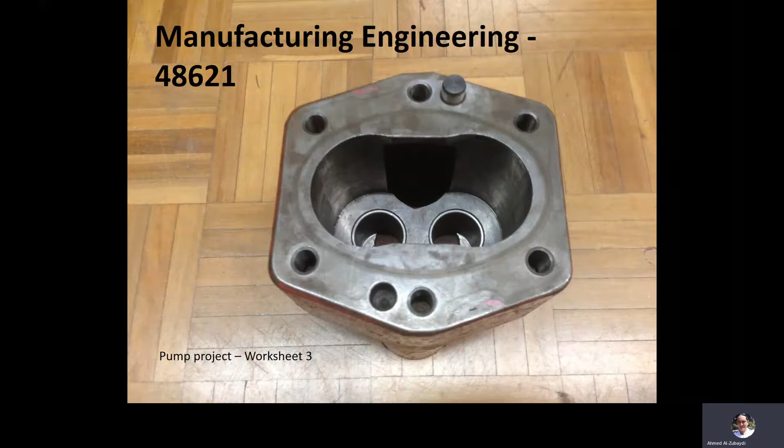Okay, so we'll start first with the slide. Talk about the third part of the major project. So I already explained the outline of the report during the lecture, and I think you got the video, right? Yeah. Yes.

Just give me 1 second. Stop doing that. Okay.

So, in the third part of the major project session, we're going to talk about the other machining processes. In the second one, we talked about the turning process for the gear parts. And of course, you remember that for the gear part itself, we should cut the teeth for the gears on the part, and this should be done on the milling machine.

The second part of the process is going to be the main body and how we are going to do machining for it. Now, as you can see from the photo of the main body here, this part cannot be rotated on the machine. It's a big solid part and non-symmetrical, so it cannot be rotated on the machine. So definitely we're going to do that part on a milling machine and honing machine or a drilling machine, but not on a turning machine.

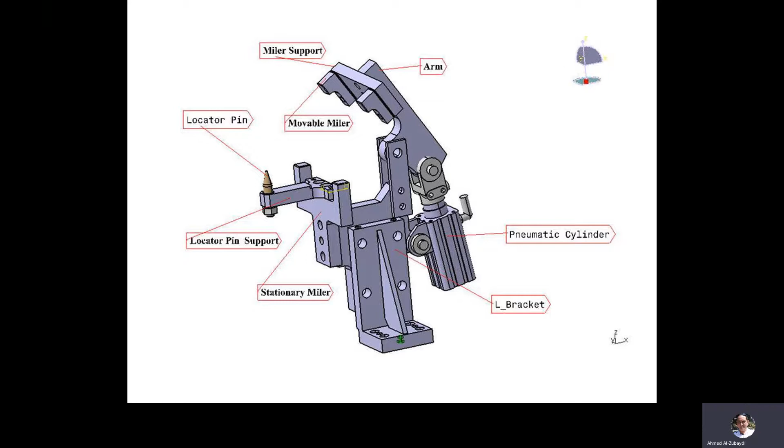We can have specially designed clamps, and this will be in case I have a special part which cannot be held with the common clamps available to us. Okay, now these are more different shapes of the clamps, as you can see here, holding different geometries during the machining operation.

Now, the most important thing for us to increase the productivity, which means reducing the machining time, is to use a holding device that can be opened and closed at a faster rate. And that's what we actually have for this one. Okay, so simply just unscrew, remove the part, and screw in another one. Even if we're going to have a machining center, we need to load and unload the parts on what they call the pallet at a faster rate. Less machining time means we're going to have less cost for the parts.

Now, this is a video for the work holding examples. I don't know why I can't have the...

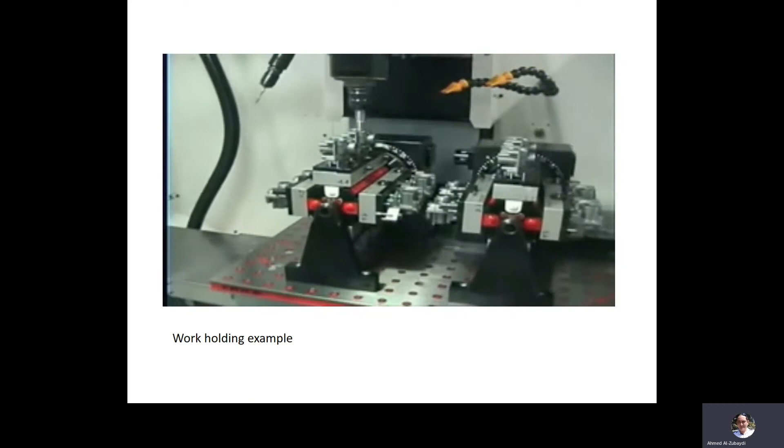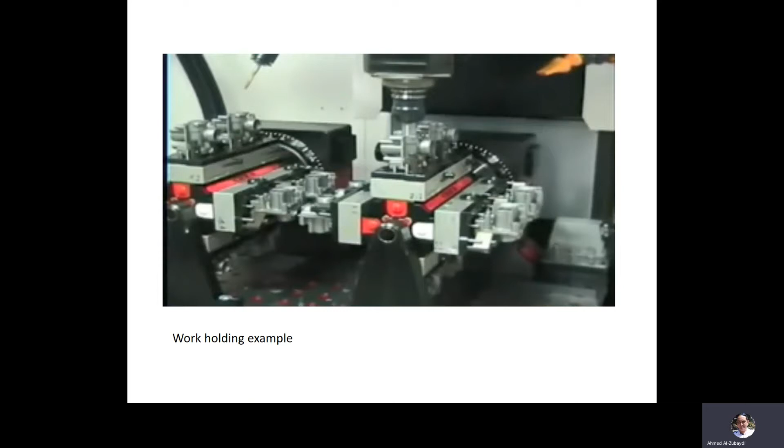So you can see that we have 2 pallets, and each pallet is actually carrying something like 12 parts, and the machining will be done seamlessly on all the parts at the same time. Now, actually, this is 2 on each side times 4, that's 8. So we have 16 parts machining at the same time. And this, of course, is going to reduce the time for the machining.

I don't know why I don't have the voice for that.

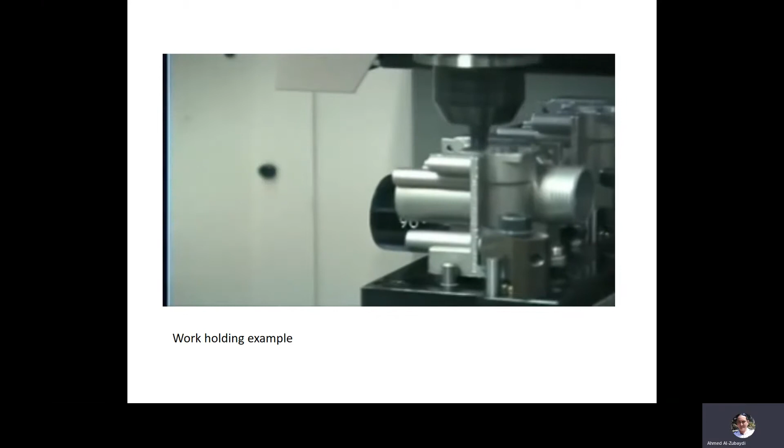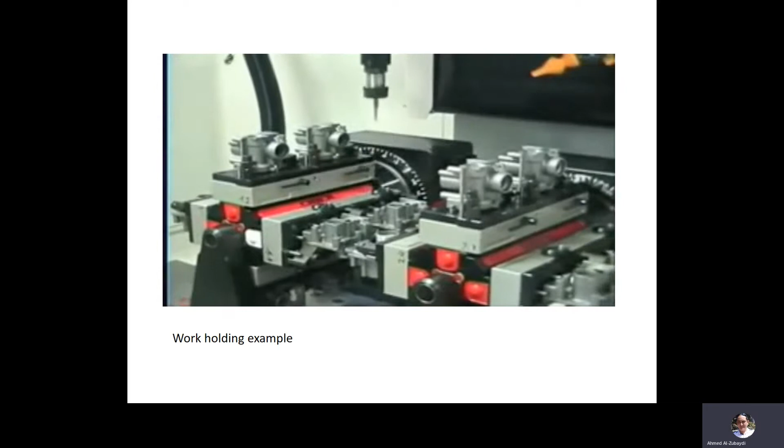Drilling, we can do the threading. Okay, so that machine, once again, is called the machining center. Sometimes it's going to be a milling drilling machining center, sometimes it's going to be a milling turning machining center, where the parts can be machined all at the same time. This part actually is a car carburetor, and that's for the old models before we had fuel injection.

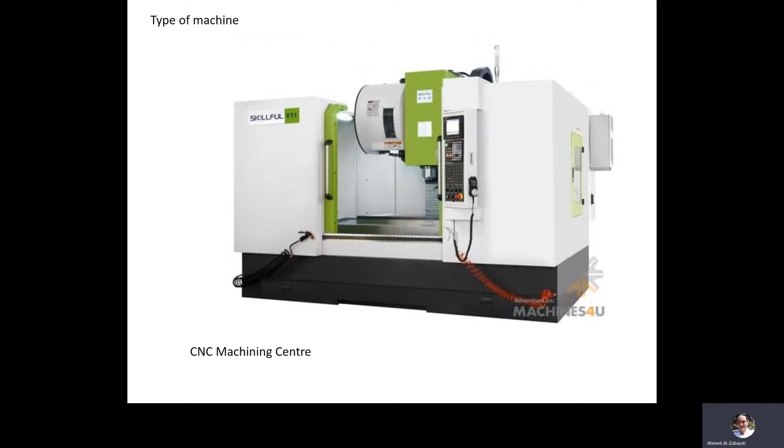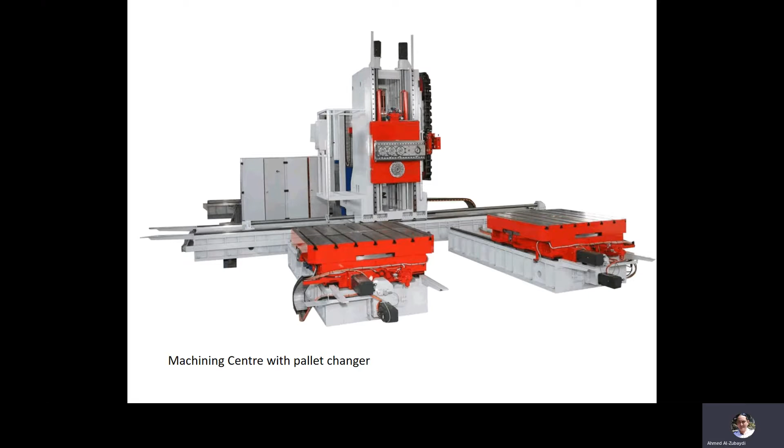So this will be the shape of the CNC machining center, where we're going to feed the pallets inside, and this is usually done by using something like this, which we call the material handling system. We have a main system and we have a secondary system. Usually the main system is going to be on this line, and here we're going to have the secondary system, where we have the buffering for the pallet before we feed it to the machine.

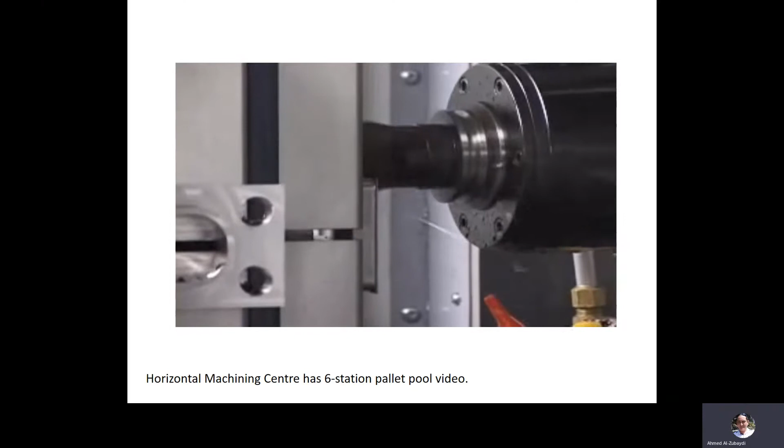System make it an easy, low-risk option for job shops looking to automate the process. Like other high-productivity machines from Haas, EC400 has a number of unique features that make it a perfect fit for both high-production environments and job shops looking to expand their capabilities. Unique features. A side-mount tool changer, automatic chip removal, 300 psi coolant, and advanced management functions make the EC400 an extremely capable resource for any production shop.

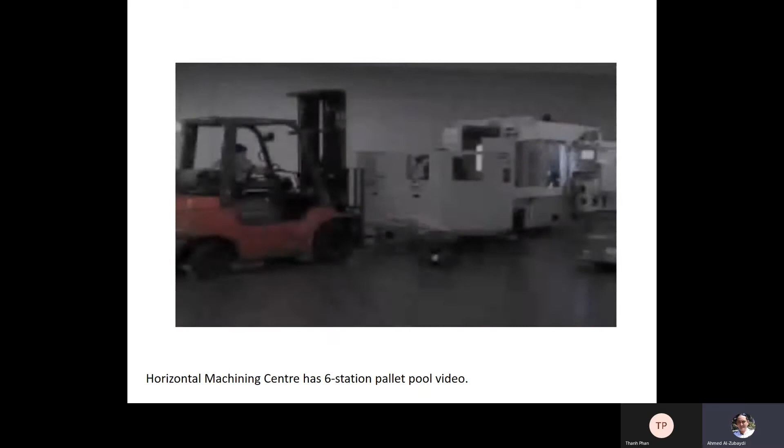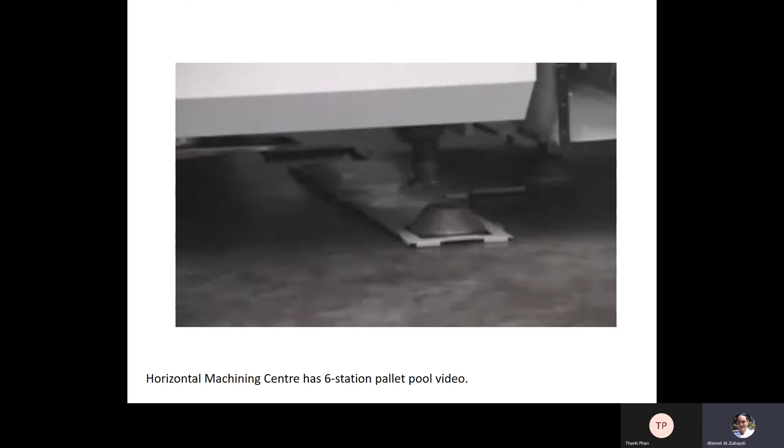Simple installation. The pallet unit is assembled at the factory and shipped in one piece. At installation, the EC400 installs just like a standalone counterpart. The pallet unit is aligned using a technique supplied with the machine. Fine adjustments take just a few hours.

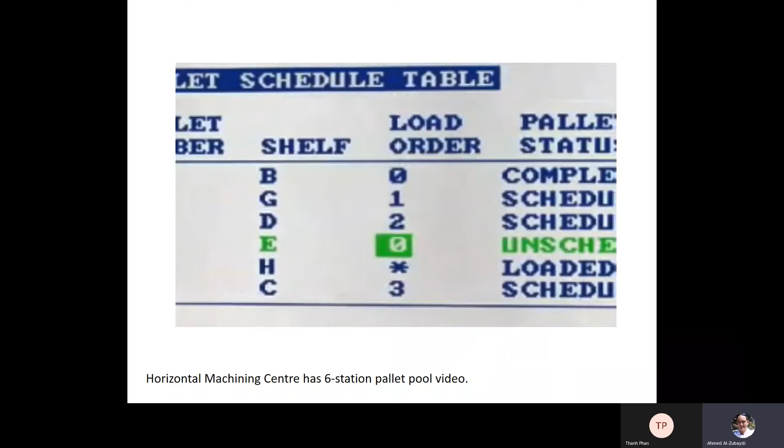Intuitive pallet scheduling. The EC400 pallet unit programs just like any other Haas machine using industry standard G code. 6 pallets in the pallet unit are scheduled using the versatile pallet scheduler for control. Here, the operator will assign a program to each pallet, schedule jobs, and the operator can move the pallet on the load station back to the storage rack, simply by entering the pallet number.

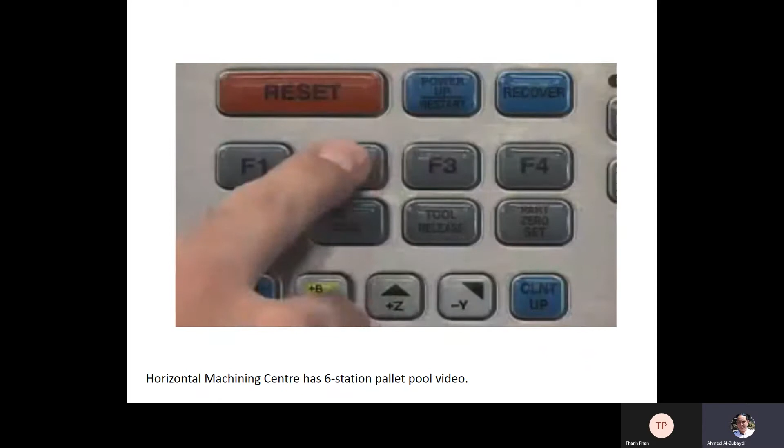Okay, so the one inside is the primary material handling system, and the one outside, which is holding the pallet, we call the secondary one. Okay, I'm not going to continue that, but it's very important to know that this machining center is a multi-million-dollar machine. So you are going to put it as an alternative machining process. It's not going to be the main one.

Why? We have a workshop. We have a CNC milling machine, and we're using it for different jobs. In case I'm going to be specialized in making this model of the pump, then we have to go for a specialized machine like this one, which can do mass production. But if this project is going to be a shop job, we had a customer and he said, okay, I would like you to make 1,000 pieces of that. So you are a contractor.

So as a contractor, you will accept the job, and he will give you standards and specifications for the pump, and you will start to do the work. You study the engineering drawings and the manufacturing process for that, and actually that's your report. So what you're writing down is the task of the production engineer. You write down how to make the parts and how to make the final assembly.

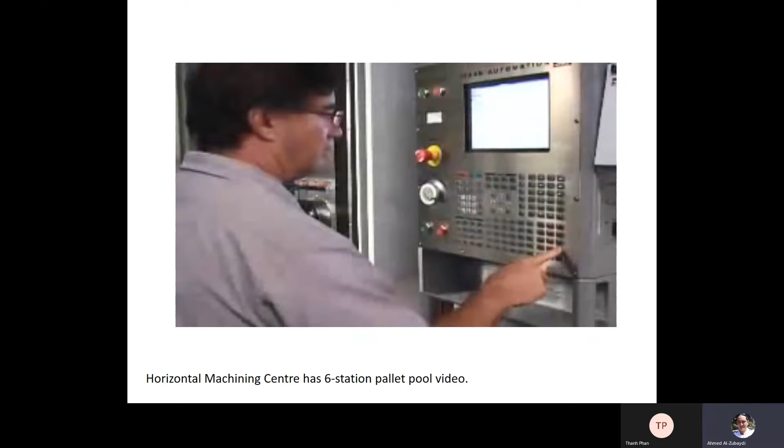So you will suggest, okay, now we have the CNC milling machine, but we don't have the casting operation, so we can do the casting with another contractor, which can be a foundry. We select different materials depending on the availability and the cost. And then we are going to have the cast parts, and we start to do the machining for them. So this is the cast part, which is going to be this one. So the first operation is going to be the face milling for the split face.

Okay. So to make this one, we need to have a certain grade. The surface finishing for this one is going to be quite important, because we're going to have a seal between this surface and the cap surface, and we should prevent any leak under high pressure. So the surface finishing for this one is going to be very important. This will be done on the milling machine.

It depends on the time required to submit the 1,000 parts. Okay, say we are going to make 1,000 parts a week. In that case, we will do the calculation. If we think it's going to be worth it to buy the CNC machining center, then we can buy it. If not, just use the machine you have in your workshop. Okay, so this will be the first operation: do the milling operation for the split face.

Important and critical dimensions, because we are going to have a leak possibility if this surface is not machined very well. Then we need to do the drilling and the threading for the threaded holes, where we're going to have the 6 studs sitting there to lock the 2 parts.

Now the dowel face: we're going to have these dowels sitting on both sides. Why are the dowels going to be important? Keeps the two halves aligned. Exactly. So it's going to guide you to the correct position of the cap on the main body. Because trying to realign it by yourself would be wasting time.

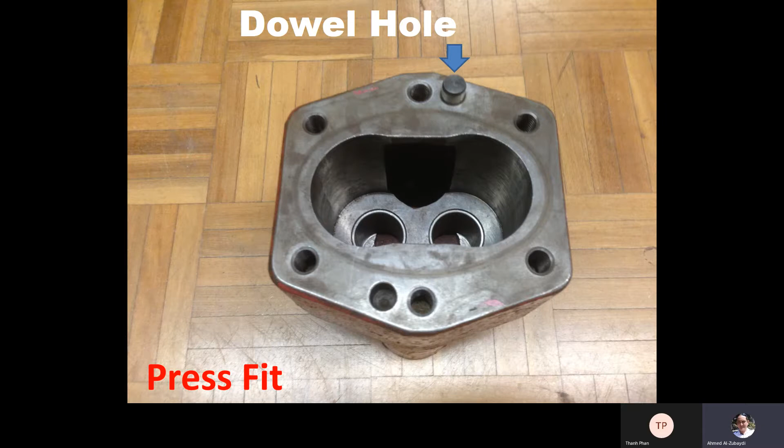Clearance fit. So the dimension is very important, because we would like to put the dowel in by doing a press fit inside the hole. We're not going to take it out for one of the parts. It should be fit there, not moving. Now, how to achieve a clearance fit dimension for the hole? You remember the steps for making a correct hole? We explained that in the drilling lecture.

We do the drilling, we do the boring to enlarge it a little bit, then we do the reaming to have the exact dimension. So for example, if the diameter of this hole is going to be 10 millimeters exactly, because the diameter of the dowel we're going to put in is 10 millimeters exactly, how to do that? We're going to drill a hole with a dimension of, let's say, 9.5 millimeters. Then we use the boring operation to enlarge it a little bit to make it 9.9.

Then we're going to use the reaming to get the exact value of 9.99 millimeters or 10. We're going to have tolerances for that. For example, the acceptable dimension can be between 10.01 and 9.999. And this is to make the dowel sit exactly inside the hole.

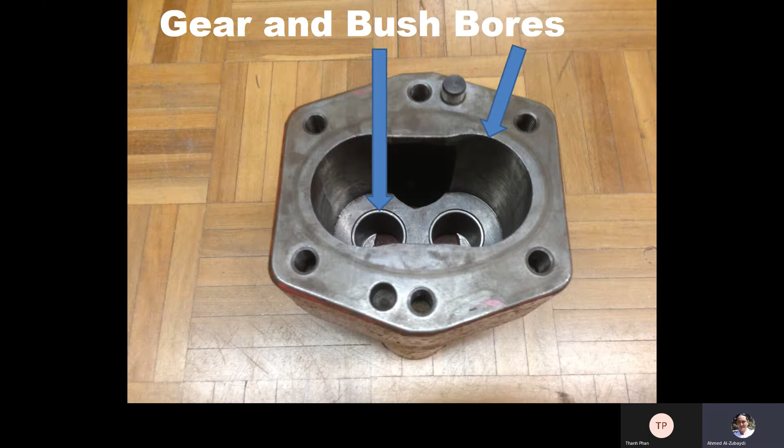Now, the next operation is going to be the cutting for the gear and the bush bores. This operation, once again, can be done on the milling operation, but we can still take it out and do it on the boring operation. Now, why did I say boring and not drilling? Because these holes are almost already available, because we put the core in when we did the casting operation. Okay, so we already have the holes. We're only going to enlarge them and make a good surface finish.

So this operation can be done by boring, or it can be done on the milling operation, depending on the accuracy or the dimension you would like to have. I think this one is repeated. Okay, so we're going to repeat that again. We do the milling for the joint face. We drill and thread the holes. This can be done on the milling machine and also on a special drilling and threading machine. And then we drill and get the accurate dimension at the clearance fit for the dowel holes.

And then we do the machining for the gear and the bush bores. This can be done by either turning, milling, or on the boring machine. And we can also do honing, by the way, because once again, we would like to have some lubricant in these holes, similar to what we have in a car engine, because the gears are always going to have contact with these walls, and we would like to have continuous lubrication. Okay, so we go now to the other side.

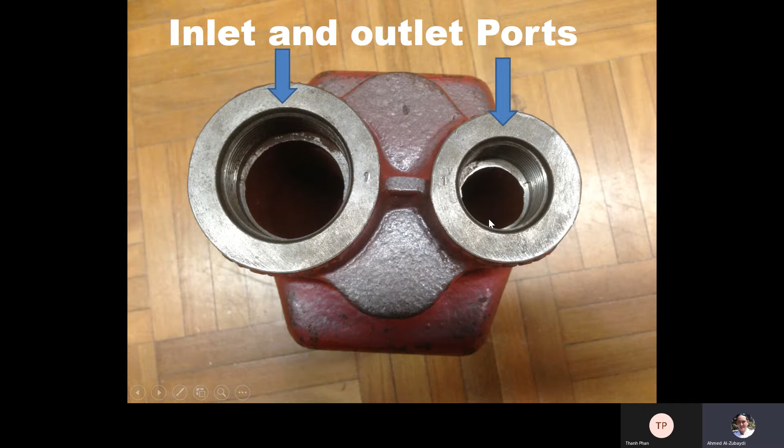On the other side, we need to do the face milling operation for both ports. On these surfaces we're going to have the milling operation. Just simply do the face milling cut, and then we can do the threading operation for these holes. Threading at this size can be done on the milling machine. So to write down these things, we can simply tabulate them.

This part of the table is coming from something called the route sheet. On the route sheet, as a production engineer, you're going to write down the steps: the machine, the tool, the description, and you give a recommendation for the cutting speed and some comments, for example how to hold the part. So operation number one is going to be the mill studded face.

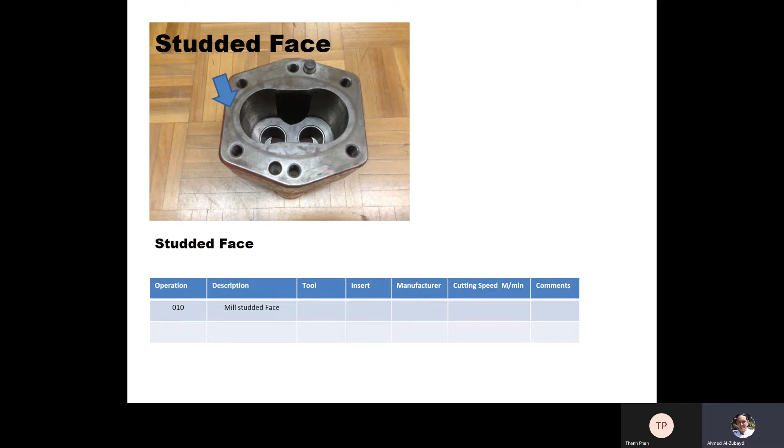I'm going to use the face milling cutting tool to do the face milling for the studded face. The tool we're going to use should be the face milling cutters, because this will be able to cut the flat surface with good surface finishing.

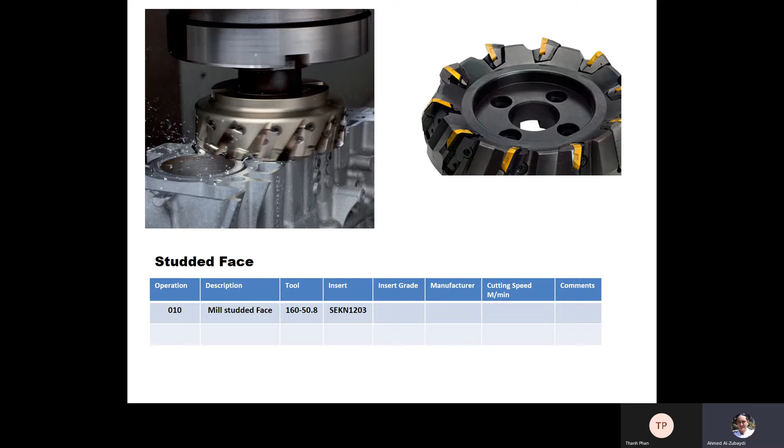Then these are some examples for the cutting tool. You can use the same tool in your table. So the tool is going to be the 160-50.8, and the insert type is going to be the SEKN 1203.

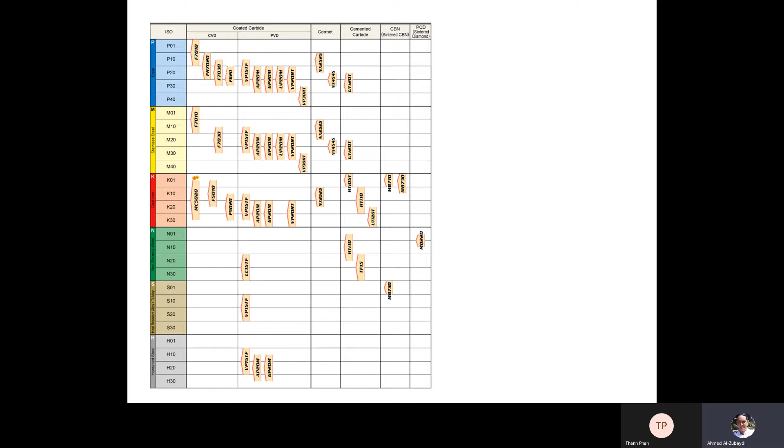For the grade type, you can get it from this table. This will give you, depending on the cutting tool, what will be the ISO standard for the insert grade. So we check the insert grade, it's going to be the K20, and the cutting speed recommended for this type of cutting tool with this material is going to be 120 meters per minute.

We give a name for the suggested supplier, so that if the workshop doesn't have it, they will be able to find it. Operation number two is going to be the drilling for the cap screw holes. By the way, this is the face milling operation, and this is the video for it.

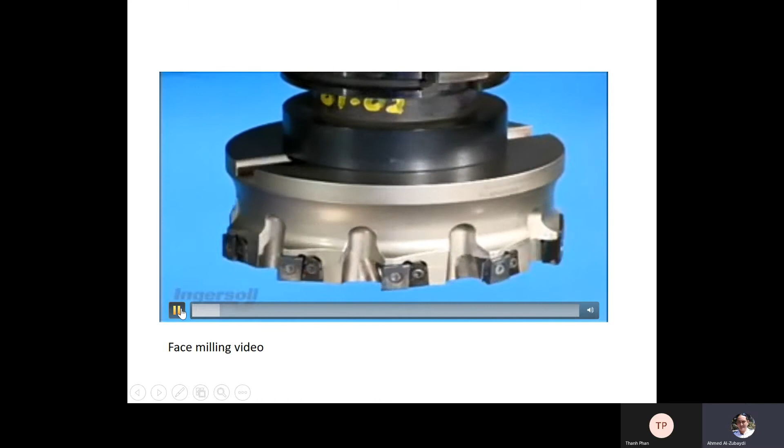Of course, more tools is going to be better for a higher rate of removal of the material.

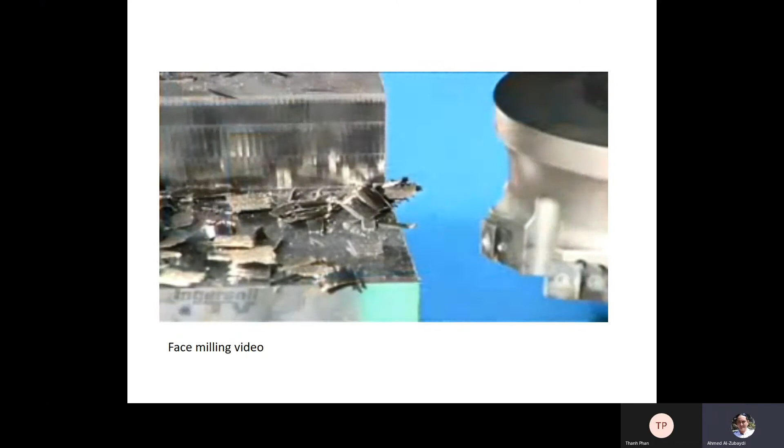And we're going to achieve a new surface. Now, of course, the quality of the surface we achieve will depend on the velocity and the feed rate, the rotation velocity and the feed rate. This is considered an acceptable dimension for the surface roughness of the part.

Can you tell me how this custom cutting tool is working? It can cut a small diameter and a larger one at the same time. So it can cut in two different diameters at the same time, meaning one shot does both cuts. This reduces the time for the machining. For example, using the 20 millimeter diameter cutting tool, just keep doing rotation multiple times to achieve the final cut.

Hey Ricky, how are you? Do you need any help? Oh no, we're going to finish in 10, 20 minutes. Oh really? Okay sweet. Are you meant to be here until 7 today? Yes, meant to be, right? Yeah, but we don't have just a theoretical thing. Yeah cool, no worries, we're covering that, we're recording it, and we're going to distribute it to the others. Sweet, alright, I'll leave it to you then. Thank you for coming, sorry.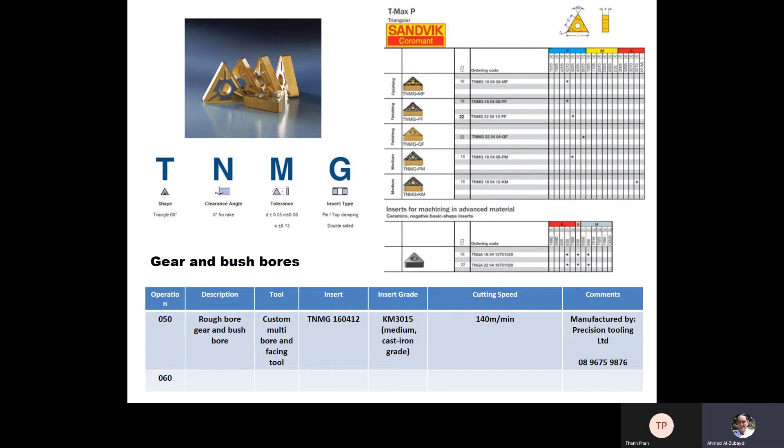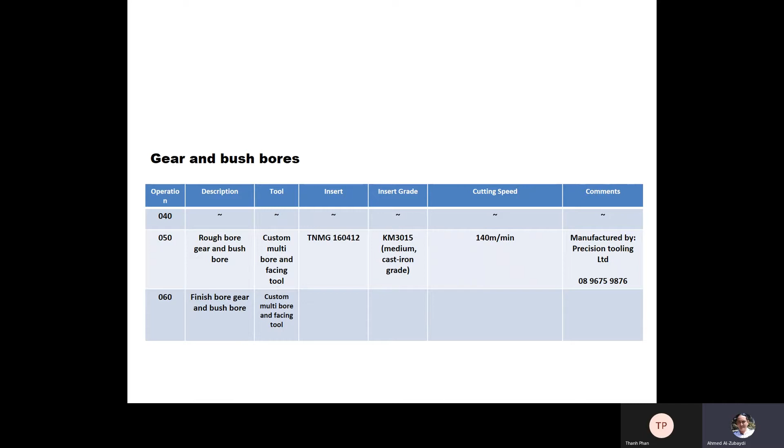The next operation is going to be, once again, the gear and bush bore. The first one was the rough cutting, and the second step is going to be the finishing cut. What you can see here is the custom cutting tool. You can see this different one, but it's going to cut different levels from inside and outside at the same time.

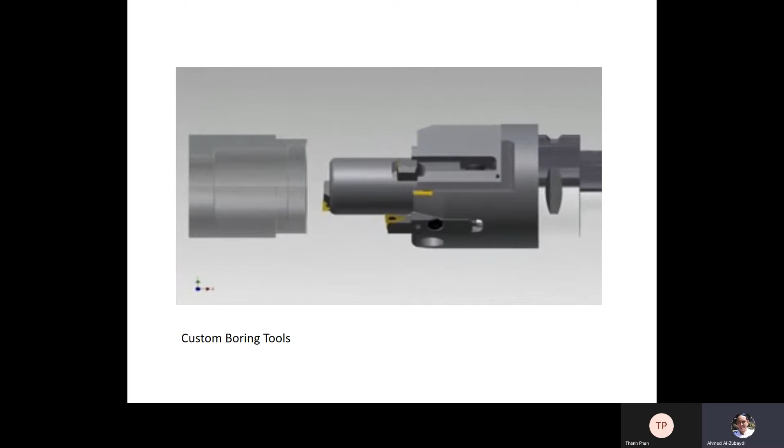Okay, so one movement is going to finish the whole work without repeating the process. You have the tables available for you for each operation. I advise you to make your own Excel sheet with the multiple steps and try to put everything there.

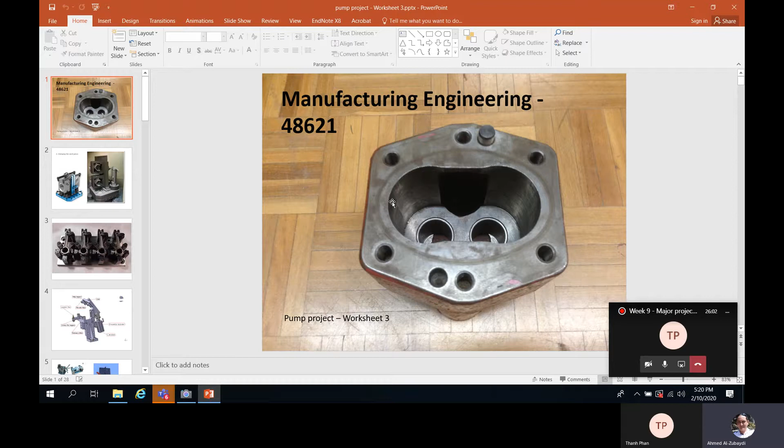Now, in this folder, I remember that I used to have the inspection process.

And this, once again, is going to be a good exercise for you to be a production engineer. You're going to be in a workshop one day, try to explain to the technician what to do and how to do it.

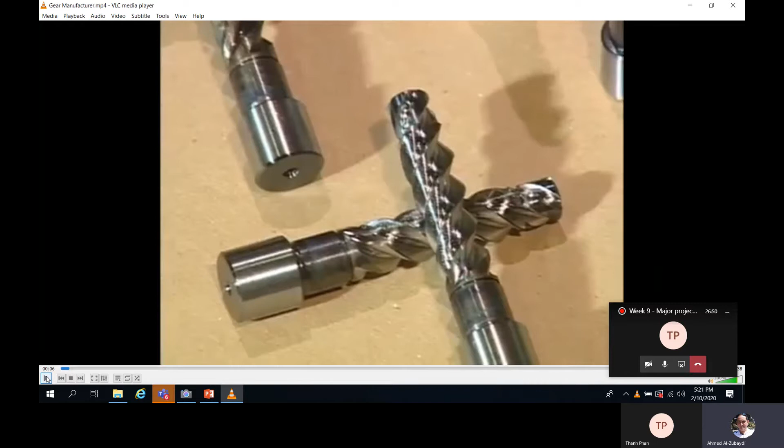Okay, now we're going to watch multiple videos before we go, and this first video is going to be about gear machining.

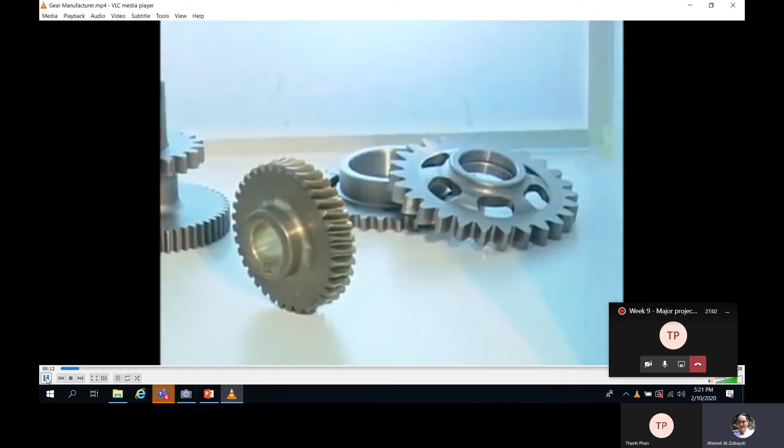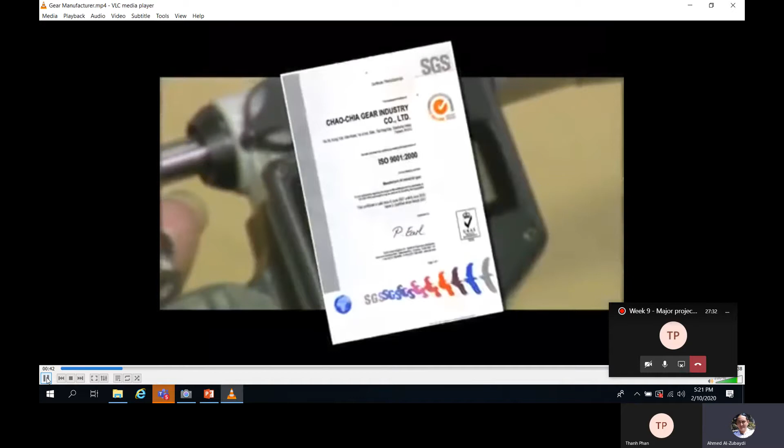Process technology in Taiwan: we have always taken to improving technology and innovating equipment as our core concept. Chao-Chia Gear Industry Company Limited was founded in 1984. It has contributed to its customers for almost 30 years. Established in eastern Taichung City, it began with the development of middle and small gears. We expanded the facilities and strongly and healthily developed, and we are now involved in the manufacture of precise micro gears, having passed the ISO 9001 international quality attestation—the most important enterprise partner.

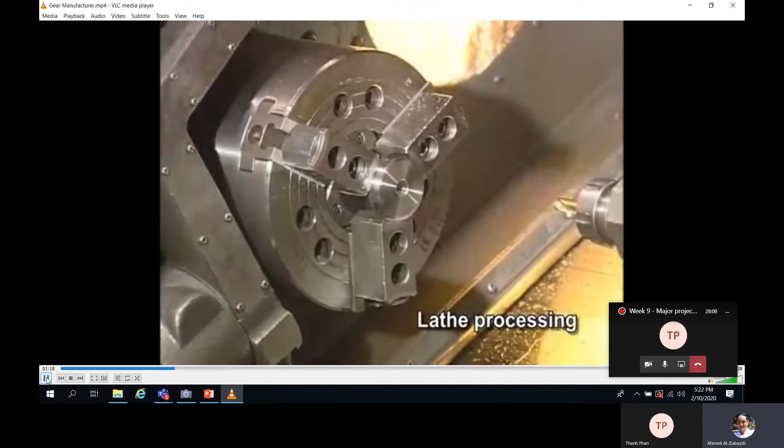Process techniques and process: procurement of raw materials. Incoming raw materials must pass relevant quality and safety standards and be certified by our QC department before further processing. Once the raw material passes QC standards, it is then put through CNC machining to achieve pre-shaping. The entire process is done by auto-feed CNC equipment to ensure high productivity and precision finished products.

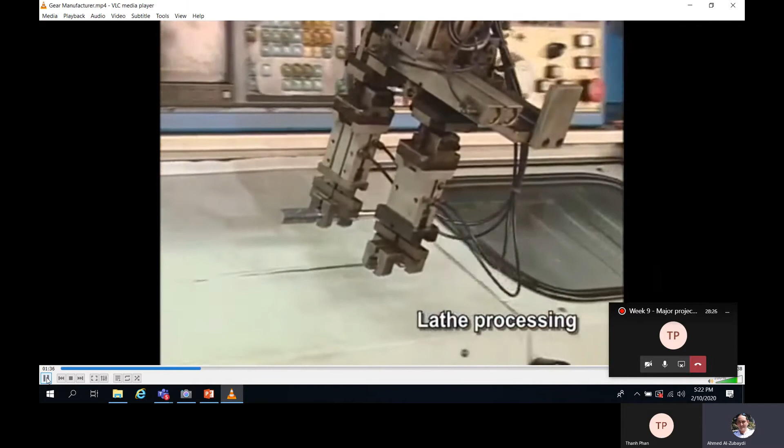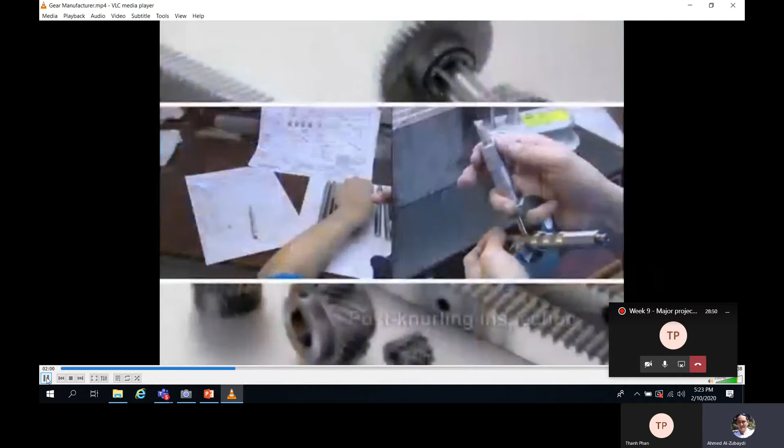A vernier height gauge and run-out inspection machine, etc., are used to check the length and concentricity of the finished product. The purpose of knurling is to improve the shaft in the way of being firmly fixed on coiled silicon steel sheet. Quality control personnel then inspect the outside diameter.

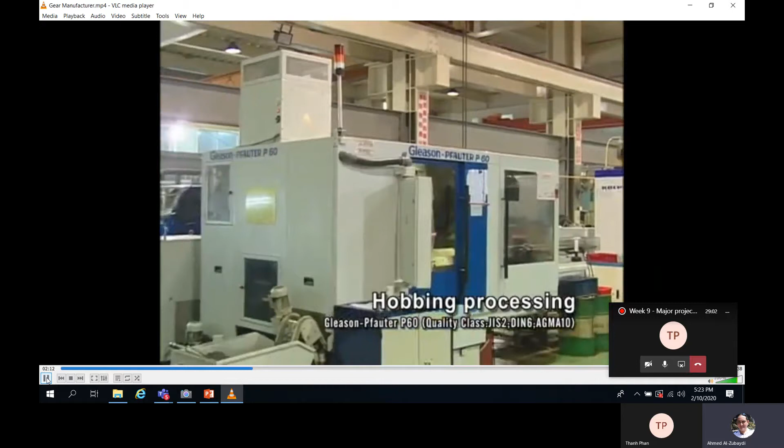Advanced equipment imported from Europe and the US is our best auxiliary to achieve excellent quality standards and production efficiency. As an example, the Swiss-made Gleason-Pfauter P60 is used for hobbing the motor gear shaft and skiving the shaft.

A US-made Phoenix 125GH by Gleason is used for machining automotive gears. Chow Chow is also a pioneer in introducing the Koepfer MZ130 for the hobbing and skiving of micro gears, as well as the machining of the motor gear shaft, bevel gear, worm, and worm gear.

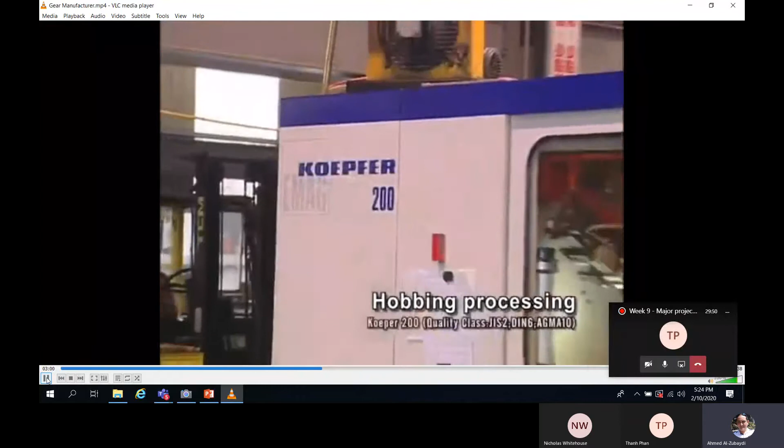Several Koepfer 200s have been imported to meet the increased hobbing and skiving demands in gear and motor gear shafts. Chow Chow will keep pace with the market trend and customer demands in order to be the provider of choice.

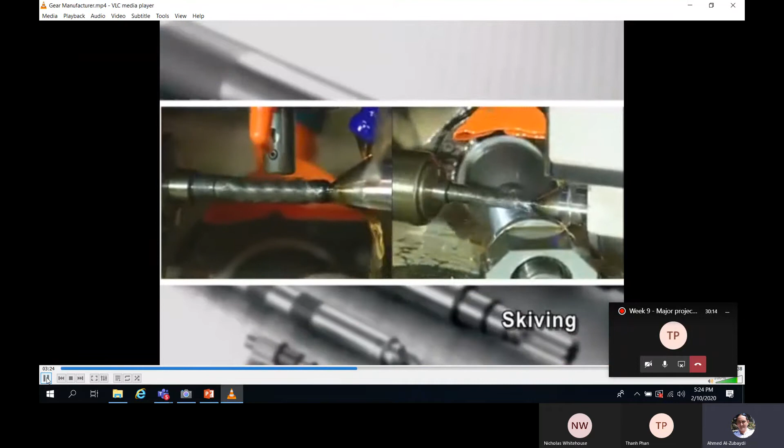The skiving process is applied to gear and shaft to correct heat treatment-induced deviation, hence reducing noise while increasing lifetime.

The tooth lead and tooth profile of the skiving process products are then inspected by a specialized inspection machine to ensure the quality of the finish. So this will be the inspection process you can talk about.

Gear lapping is a surface treatment of the gear and a common way to increase gear precision. JIS 0 or DIN 4 is attainable by this method. In addition to the state-of-the-art inspection equipment used to carry out computerized inspection of gear profile, gear lead, and pitch, QC personnel routinely sample the tangent length, groove diameter, topping, and outside diameter.

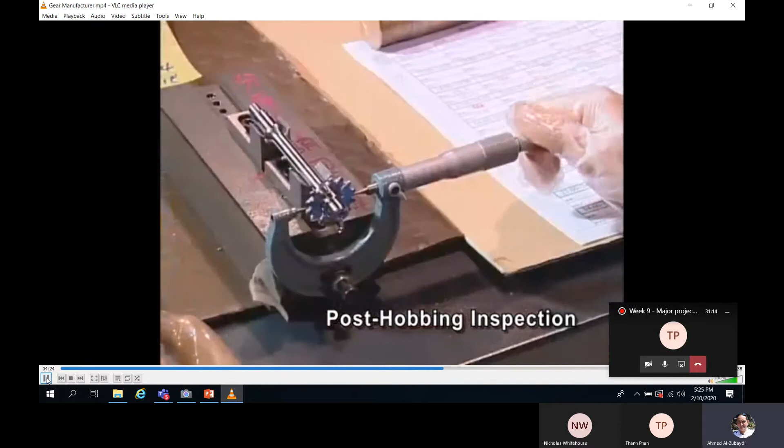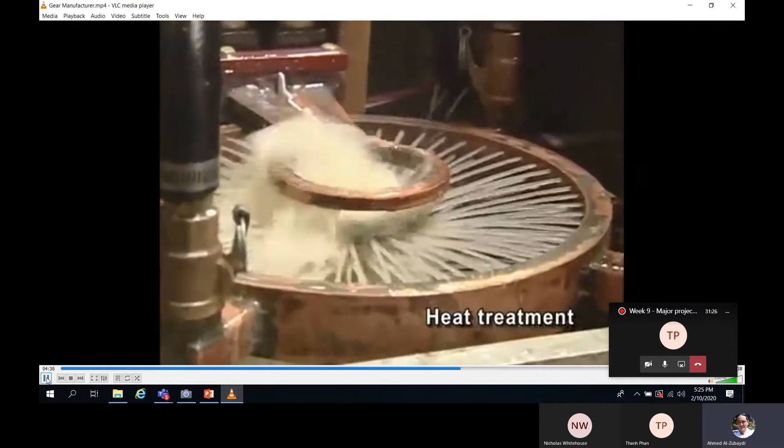We also provide heat treatments such as carburization, high-frequency hardening, and nitriding to harden the surface. Heat-treated final products will then go through slice sampling and embedding inspection for the correctness of the hardened depth and stability.

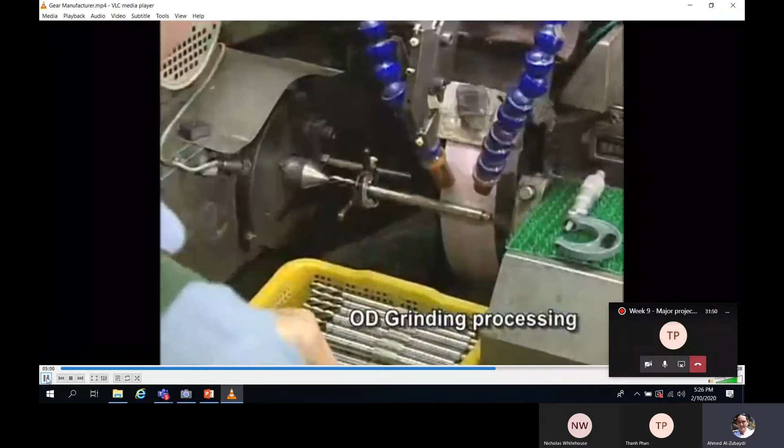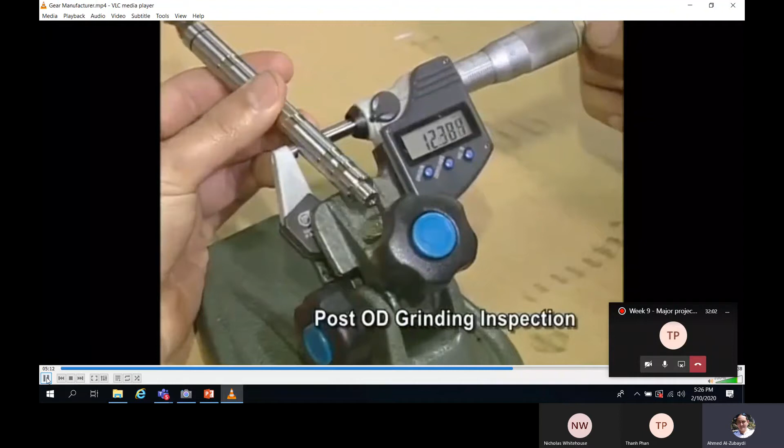The precision grinding of the shaft will increase its roundness, followed by a full inspection of our final products in terms of output appearance and outside diameter. To further increase product quality, an automatic ultrasonic cleaner is used for cleaning and drying to prevent rust caused by residual moisture on the final product.

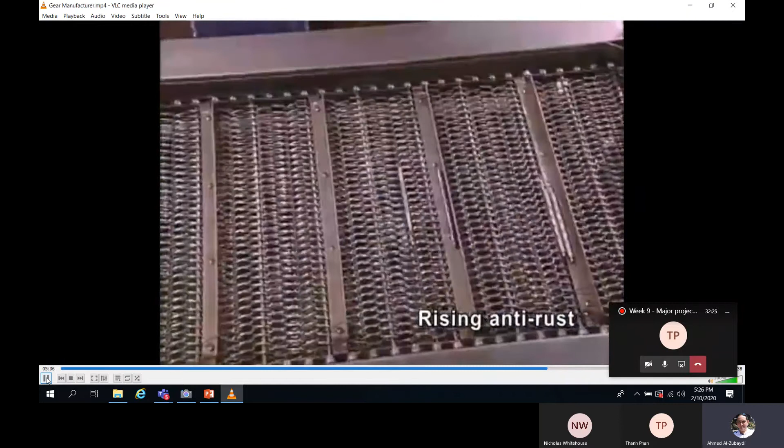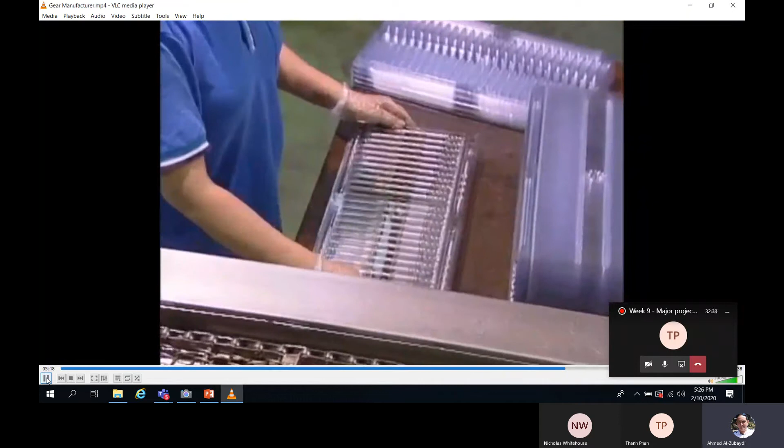It is then packaged to ensure the integrity of the product during shipment. Finally, the product is shipped to the customer designated location, accompanied by a complete shipping and inspection report.

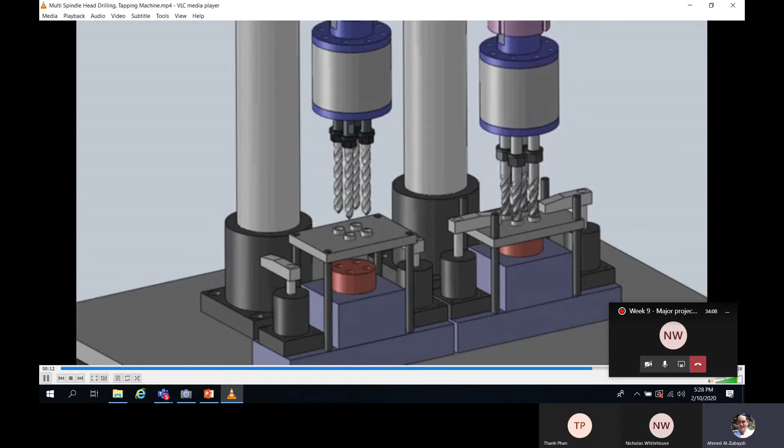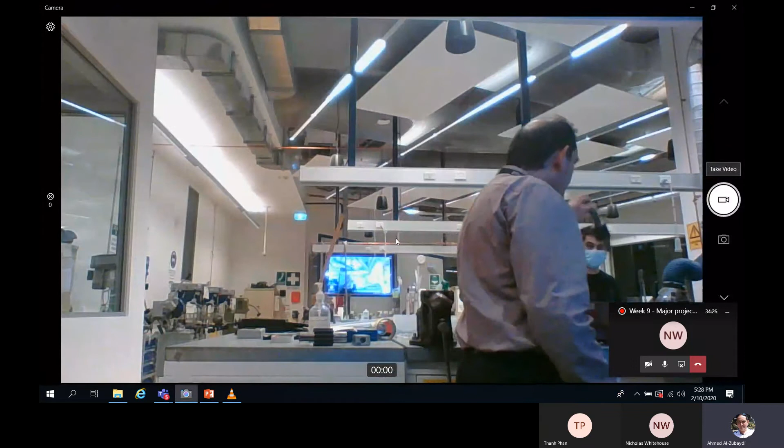Okay, so now I think that we need to finalize this session by talking about the product itself. So that's my product, and of course the first part is going to be machining the shaft. This shaft definitely is going to be done on the turning machine.

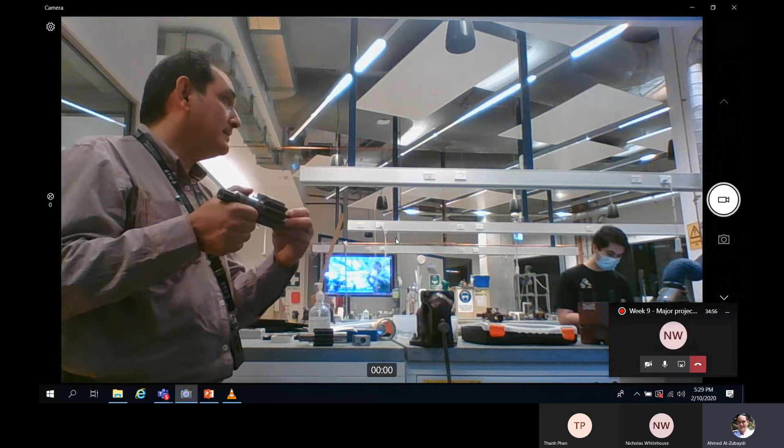Then we're going to do the cutting of the gears by using one of the operations we just described in the video. When we finish with that, we're going to do the heat treatment and the grinding for the size, because these sizes are going to be two critical dimensions to avoid having any struggling in the rotational process. Reduce the friction by increasing the surface finishing.

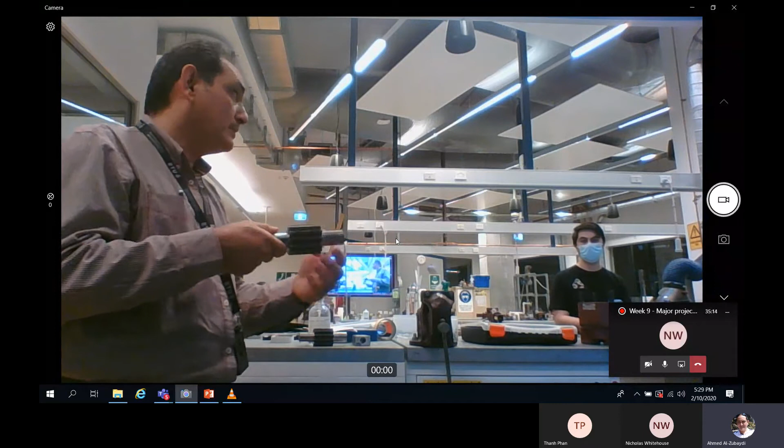Also, another critical position is going to be the gear surface. We need to do a good inspection for the gear teeth, otherwise we're going to have hanging for the gears when they start. The diameter of the gear is going to be another important dimension, because this may stop the gear from rotating inside the bore.

We need to do the splining. Usually the splining is going to be done on the milling machine as well, and also it can be done by the hobbing operation, and you will have something like 2 to 3 different operations to make the splining here.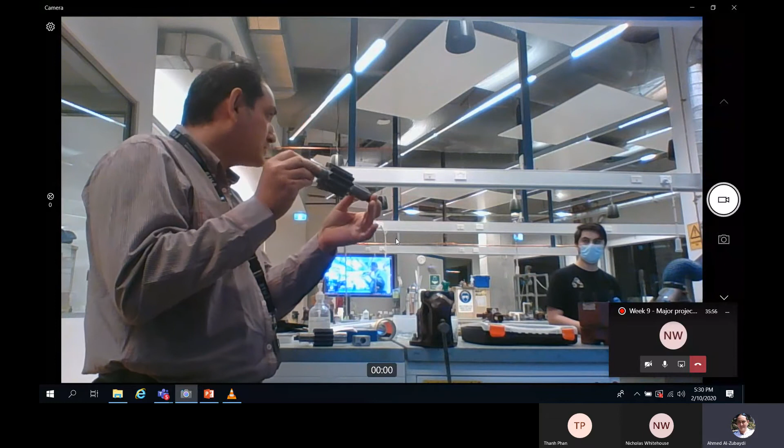Now these holes, by the way, at both ends of the shaft, simply because we hold it on the turning machine, on the grinding machine, we can do the grinding operation for both sides. That means this part was rotating between centers, and you can refer to the grinding operation lecture to remind you about what we're going to do.

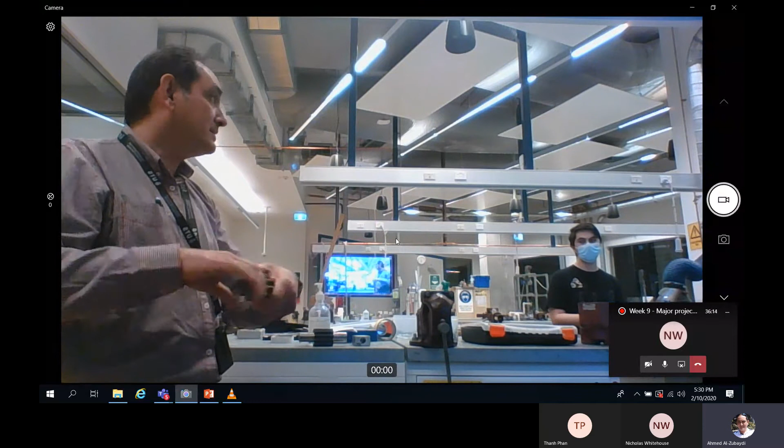Now, once again, for this operation, we're going to have two faces, face number 1 or side number 1 and side number 2. We need to do it either on 2 setups on the machine. For example, to put this face first, do all the operations starting from this point to the end. Then after we finish the first cut, we take it out and do the second one.

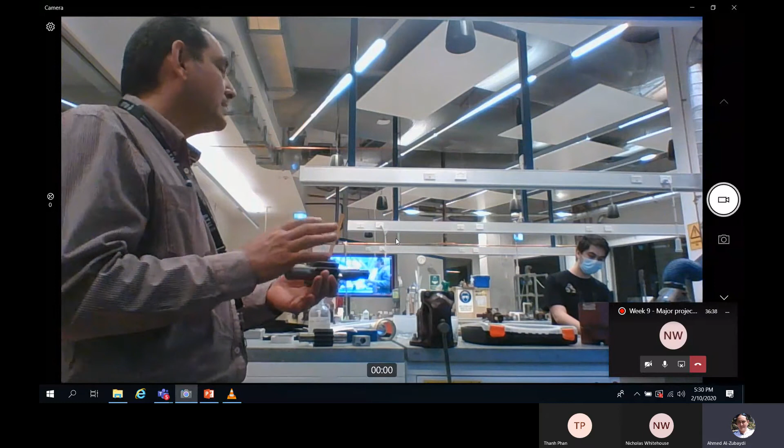In certain circumstances, if you have a twin spindle turning machine, then simply we can do it with one setup. Hold the part, do the first cut, then send it to the other spindle, do the second cut, and the part is ready. Put that as an alternative machining process, because you don't have the twin spindle all the time.

When we finish with the shaft, we go to the main body. The main body is going to be done by the casting operation. When you finish the casting, you are going to do some basic tests for it.

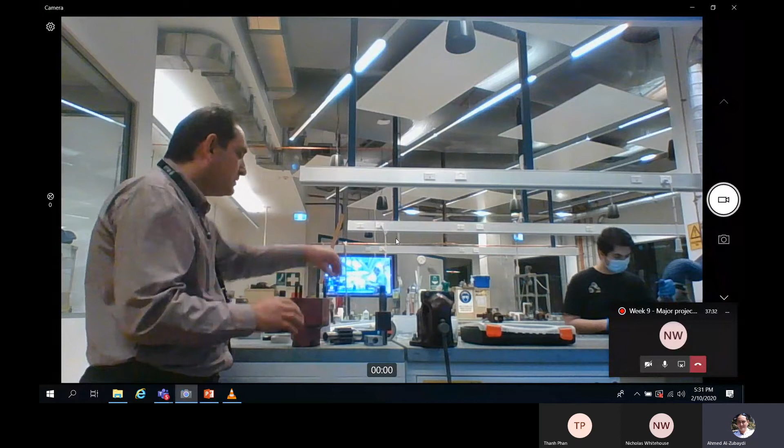For example, you can simply hammer it to know how brittle it is. We can do the compression test, we can check the vibration, everything to check the quality of the casting. Actually you can search online to find the different types of testing for casting quality.

Through the casting, we are going to have the pre-holes. And of course, this surface is going to be something similar to the surface we have here, which is going to be a very rough surface.

This face is too critical because we are going to have the gasket, and then we're going to add the cap, the cover. By the way, the operations to make the cap, can you give me?

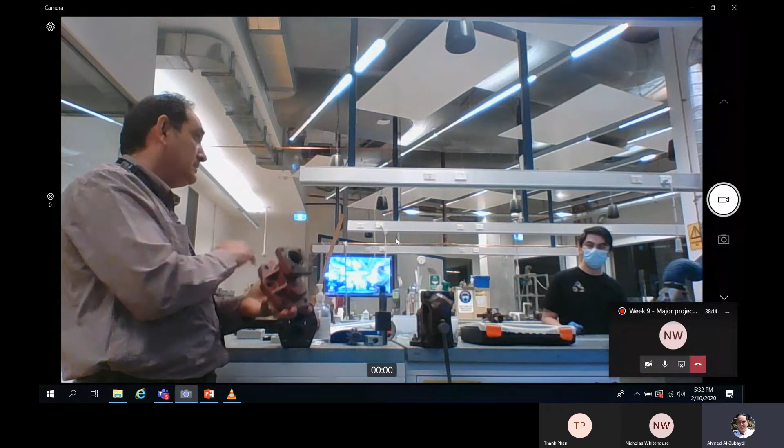So the operation to make the cap is going to be exactly the same as the operation to make the main body. This will be done by casting. We're going to do the face milling and drilling. Here, the difference is going to be the slope cutting, which is another operation we have on the milling machine.

So when we finish cleaning and inspecting the casted part, we start on the milling machine. On the milling machine, we're going to do face milling, drilling, and threading for the 6 threaded holes. This can be done using a similar machine—actually, not a different machine. The cutting head itself can have multiple spindles, which can do 6 drillings at the same time and 6 threadings at the same time, and this will reduce the machining time.

Also, we're going to have these 2 dowel holes, and this will be a press fit part. So we have to take care about the dimensions of these dowel holes. To do this drilling, we have to do it in multiple steps.

The first step is going to be drilling, for example taking it to 9.5 millimeter diameter. Then you do the boring, which is enlarging the diameter slightly. Then you do the reaming operation, which increases it to a very specific diameter—removing a very thin layer to get the exact size. So 3 steps for the dowel holes: drilling, boring, and reaming.

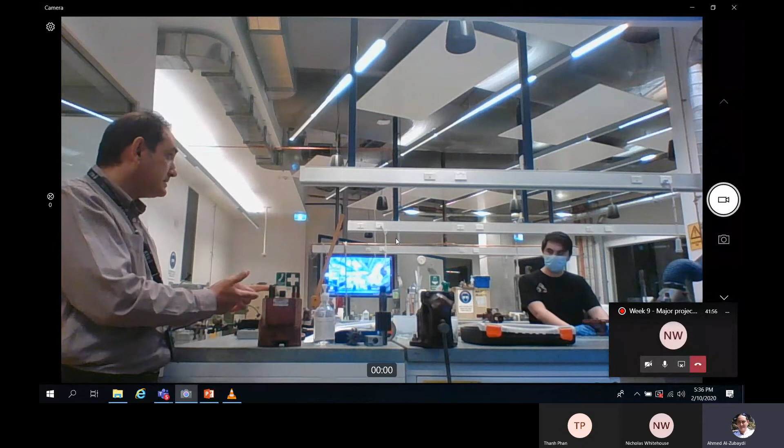The same thing repeats for the cap. For the other parts, for example these, we can machine them from bars, but since the diameter is standard, you can buy the double-side threaded shaft directly from the market. It should be available for other operations too. All the bolts, nuts, and seals can be bought out of the shop.

Now, for the thrust plate—for each pump we have 2 thrust plates—this is going to be done by the die casting operation for mass production. It's made of aluminium.

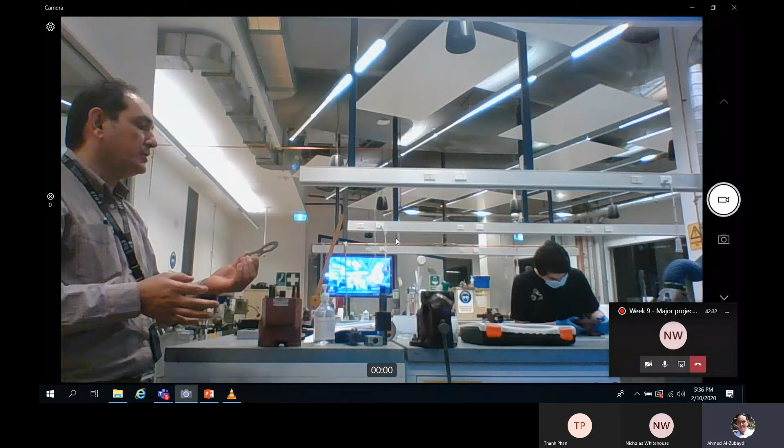Some of them, this one doesn't have, but the other one does have some cavities, as you can see. This is actually to recirculate the oil during operation.

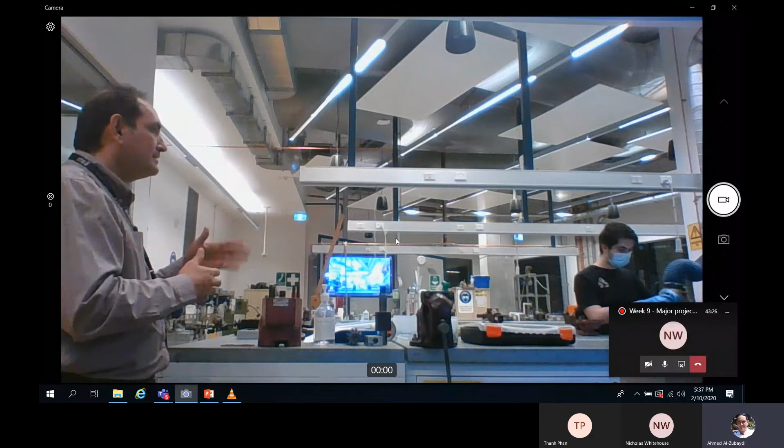How to make the bearings: they're going to be bushes with Teflon inside. This should be done by a specific operation, the coating operation, which we discussed in the surface treatment operations in manufacturing. So this should be done by an external contractor, but mainly we're going to have the rolling operation to make the parts a cylindrical plate, and seam welding on the side. Now we need to coat it with the Teflon, and it's going to be ready to use.

These parts, the bearing is going to sit inside the holes by press fitting as well.

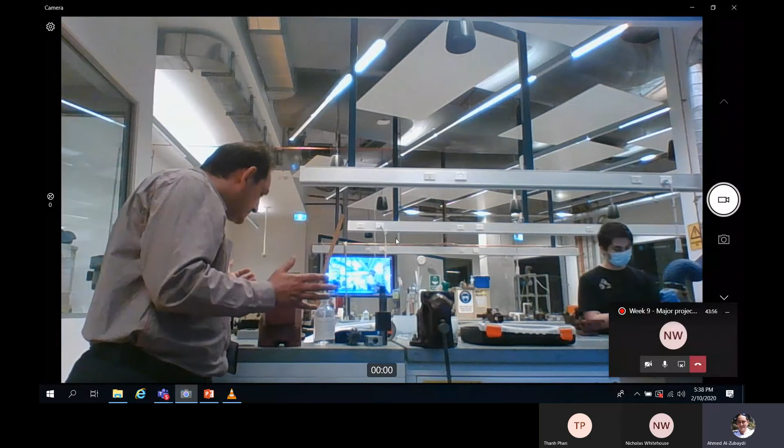Okay, so I think that we covered everything. And if you have any question, go ahead.